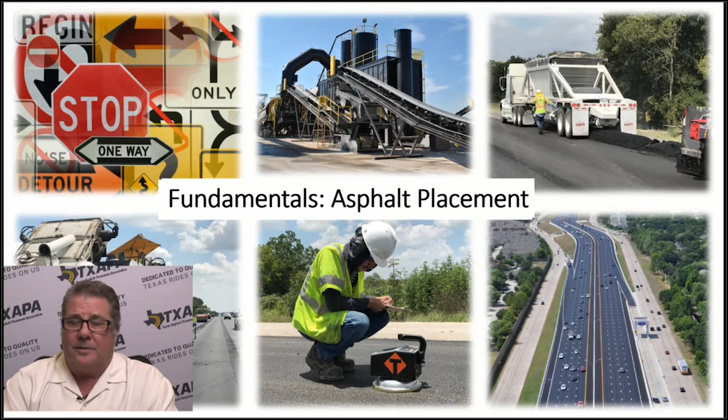Absolutely. And again, I really struggled with this particular portion of the fundamentals, because placement is so important. And I don't like to use the word basic, because it's not basic. It's difficult, it's complicated. But with Jim's help, we put together this presentation to cover the fundamentals, the essentials, the core of what we're trying to do, and that is, again, place award-winning mix. Yeah, if we get these parts done, we are 80% plus the way there, and we're going to get the type of pavements that we want. We're always going to be tweaking, but the communication and everything else we're going to talk about today is going to get us the rest of the way.

But it's important. Let's make sure we're doing these things every day, because as soon as we drop the ball a little bit, that's when one of the wheels falls off, and that's when we start to see issues. So it's hard in this industry, because you're trying to do the same thing day in, day out under changing conditions. Changing situations, different lifts, different areas, moving here, moving there, and still trying to deliver the same level of quality. So that attention to detail has got to be real high up on the ladder. But getting this stuff done right is going to get us where we need to get to.

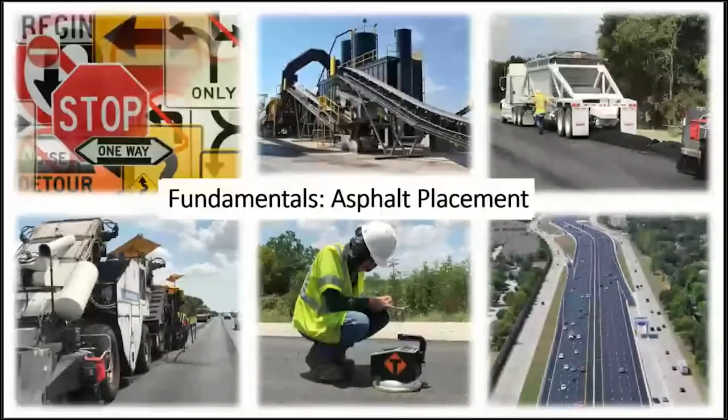So getting us kicked off, the very first thing that I have to go into is communication. Again, we need to start with the fundamentals, and this is communicating with everybody involved in the project. All of your QC and QA individuals need to be on the same page with your paving superintendent, your plant foreman, your trucking foreman, everybody needs to be on the same page. And what are we here to do? To safely build quality projects. That's what we're here to do. Nobody wants to be associated with a premature or a failed project, or a project that's really rough, or a project that looks terrible. Nobody wants to be associated with that.

Yeah, that's certainly one you don't want to talk about when your family's driving over.

Absolutely. And again, the way that we do this, the essential, the core to this is communication. If anybody's been around me any time at all, knows that I always bring safety first. And then my communication and quality is following second. But you have to be able to communicate, be open-minded. You cannot be closed-minded, and that's on both sides of the aisle.

We have to be in it for the same purpose, and that is to build quality, award-winning projects safely. That's the whole thing about communication. I can't stress enough. We've got to be on the same page here. And again, it's the core. It's an essential to being able to produce and place quality award-winning pavements.

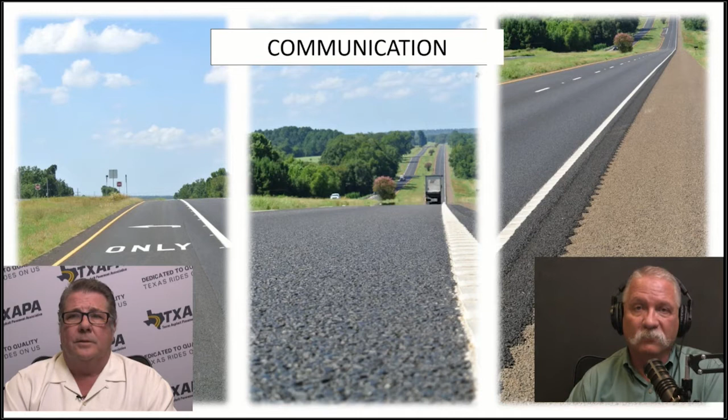Yeah, let me just share a real quick story. Got an email today from one of the students in our inspector series, and he was having trouble getting a certificate. We got it all sorted out, mainly because I made a mistake again. I'm pretty prone to doing that. But he made an unsolicited comment.

He says, we tried to apply the stuff we picked up in the class, and a lot of the class was about communication. And as he did that, the contractor was initially kind of like, "Hey, what's going on here?" But they explained it and they got around, and then him working with his other inspectors, he said, "Hey, they're already seeing a difference about just understanding those basic concepts, the fundamentals, whatever you want to call them, and executing them and getting everybody on the same page."

And so my guess is they're doing the debriefs like we've been talking about, and doing those other things. And initially, maybe a little weird, but they do work. They do work. I'm a firm believer in it. And again, it goes without saying that this is the core. This is where we need to start.

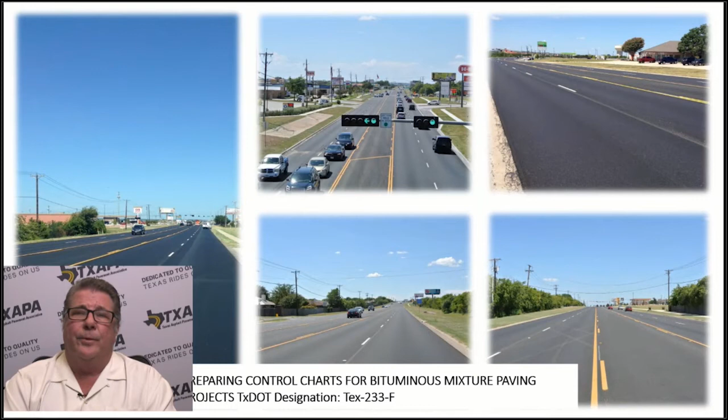The next thing we have to do is we really and truly need to pay attention to the specification and follow a quality control plan. It's part of the specification. It's something that we should be doing. Let's utilize it correctly. Every one of these projects are different, whether you're in an urban setting or a rural setting. Each one of these projects are going to be built differently.

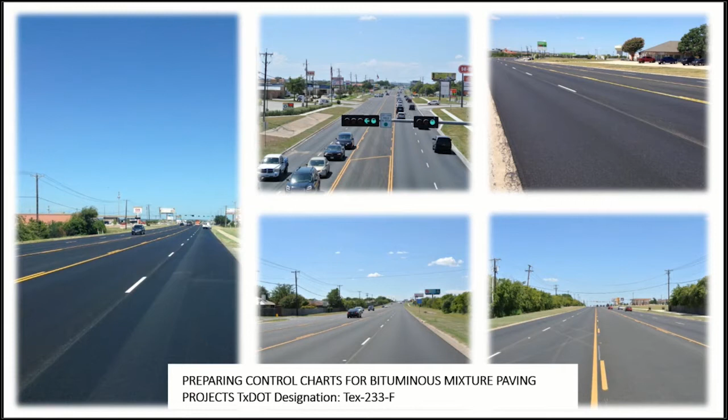And in that quality control plan, it states that you tell us how you're going to build the darn thing. And within that, it also states that you need to be able to use these control charts. And I'm telling you, if you plot your QC data on these control charts, you will know before you start having a QA issue. I cannot stress this enough. I'm a firm believer in control charts.

Jimmy Whited had taught me about control charts a while back. And I'm telling you right now, that is the way to go, both at the asphalt plant and in the field. If you're plotting your QC results and your QA results on these control charts, you'll be able to determine before you have an issue that an issue is going to be, and you can address it before it becomes an issue.

And again, quality control is for the contractor's protection. Run all those quality control tests, make sure you're on the same page, communicate those results to everybody involved. If we have an issue, bring that issue to the forefront and address it immediately. If you use these control charts and you run all your quality control tests, your QA will follow hand in hand, and you'll have an award-winning project like we're looking at here. These are all award-winning projects.

And they were done because they had a good quality control plan, they were following the specification, and they were communicating the results. So that's the start. Communication. Proud for anybody to ride on, and as you've said many times, we don't want surprises. That's right. By communicating, by sharing that information, by staying on top of it, by forecasting, looking for trends in your data, you're going to be able to do that.

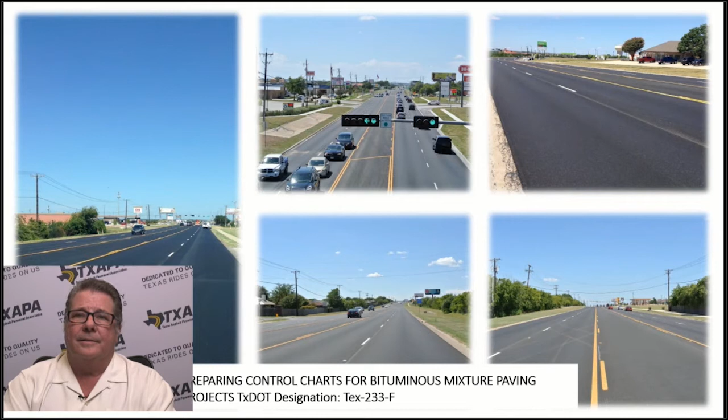And everybody, it's easy to do. It's not hard to do. It's just a matter of doing it and then starting to understand it. So good stuff. So we got the fundamentals, the basics out of the way. Let's get into our paving.

The very first thing that we have to really pay attention to is our traffic control plan. And since you've been here, Jim, you have stressed the fact that we need checklists. Yep. And I'm beginning to believe you that checklists are the way to go. And again, our checklist is let's look at our traffic control plan. Are we using an approved traffic control plan? Check. It's in the specifications. It's in the plans.

Is it properly installed? Check. The only way you know that is if you go through there and you double check where everything's at. Do we have the right signs, the right spacing? Do we have our cones at the right spacing? Do we have the right lengths, the right tapers?

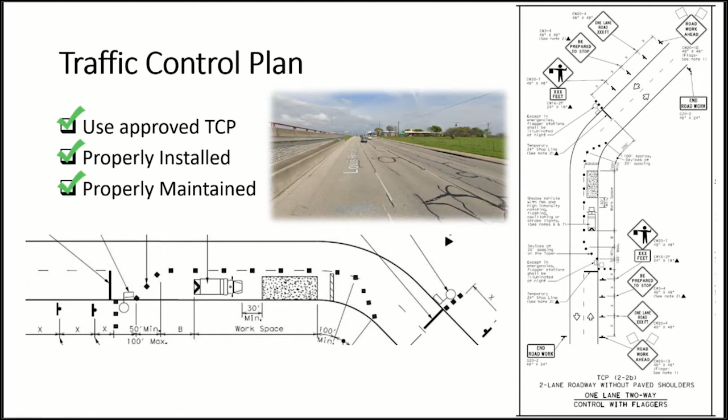So I want everybody who's listening right now to remember properly maintained, because we're going to hit that a little bit later on. Remember the words properly maintained, because if we don't do things safely and don't go home to our families, it's all for naught. Yep. And the traffic control plan set up properly and well maintained is going to help us do that.

And again, it's part of the plans, it's part of the specification. But before we start our paving process, we need to check off the fact that we've got our traffic control plan, it's in place, it's approved, and we're all on the same page. And remember, properly maintained. We're going to hit that in a second. So what about surface prep?

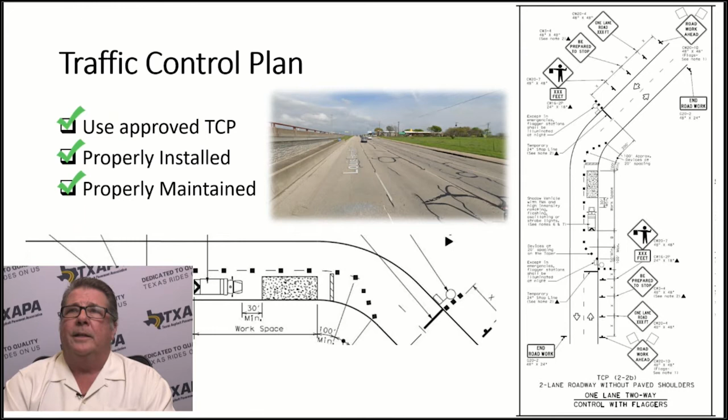Man, that's a key there, brother. Surface prep is a key. So is it clean and dry? And before you put a check mark there, just because the roadway might appear to be dry, with all this rain we've had in Central Texas over the last two weeks, is our roadway bed really dry? In other words, is there trapped moisture? Because as soon as you start putting a tack coat or a membrane down, you will trap that moisture. You're going to find it.

And I think that's a really good point, Chuck. After all this rain we've had for about a week and a half now, everything's wet. The stockpiles at the plant are wet. The base is wet. People want to turn the key and jam on the gas pedal, but we've got to be thinking about that, and our partners need to be thinking about that too. Just because we can pave doesn't mean we're ready to pave because of all the water we've had.

Especially if we're overlaying concrete pavement, those joints have absorbed that water, and that water is going to come out. Yeah, that's the thing. So checklist on clean and dry. Check on the smoothness, milling, level up, spot level up, what we need to do. And then again, tack coats. Hey, we're being paid for tack coats.

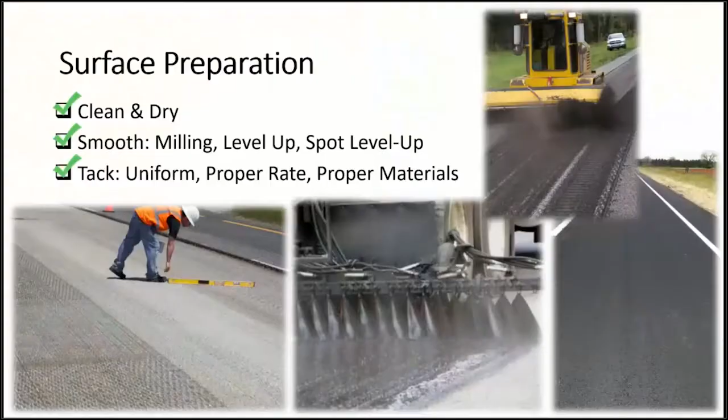All right, so now let's talk about trucking. So we got our surface prep, we got our tack coat. Trucking, do we have enough trucks? Is it going to be a balanced production rate? We're going to talk about that a little bit later, but do we have enough trucks for continuous paving? So if our balanced production says that we need 13 trucks and we only have 10, we're not going to do continuous paving, guys.

Well, you can have the trucks, you can order the trucks, have it all lined up, but a lot of contractors use subs, and sometimes the subs don't show up. Stuck with what you got. You're stuck with what you got, and you've got to be able to adapt and adjust on the fly to make sure you can still get consistent or continuous paving as much as possible.

So are our trucks clean? Sometimes when we have a milling field, that truck is taking millings back to the plant and then bringing hot mix back. Make sure that they're clean. Somebody needs to be looking at that. Yeah, tarps. Again, the specification covers tarps. Big fan of tarps. Are we loading properly? Do we have the multiple drops? Are we making sure that we're not segregating the materials in the trucks?

And then finally, I want to know about the clean out location, Jim, because this is one of your pet peeves, and you've seen it and I've seen it. Yeah, so cleaning out in front of the paver is not what we want to do. Cleaning out in front of the paver is not where it's at, huh? Not where it's at, baby. We need a dedicated place. Everybody knows where it is. And that dump man isn't raising his bed back up. He's dropping the bed, going to that dedicated spot, getting that stuff sorted out, then getting that tailgate latched and getting back to the plant for another round.

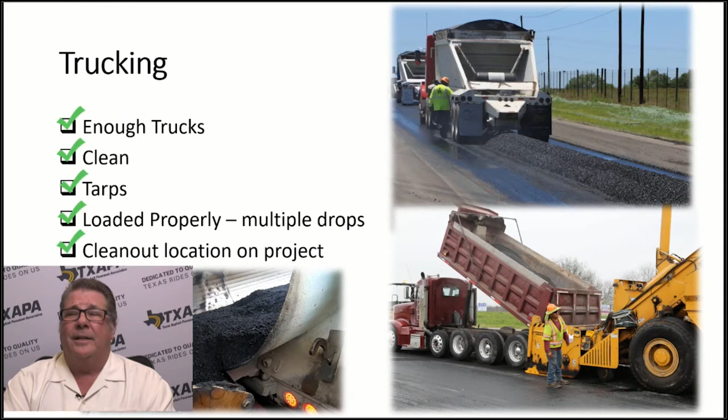And again, it goes back to communication. Who's going to designate that area, where is it, and do all the truckers know about it? It just boils back down to that communication. I've seen contractors where they've actually got it flagged out, flags set up in these areas. They know where to go, and the ingress and egress of trucks into the job site. We talk about traffic control. Trucks have got to get in. They've got to get out.

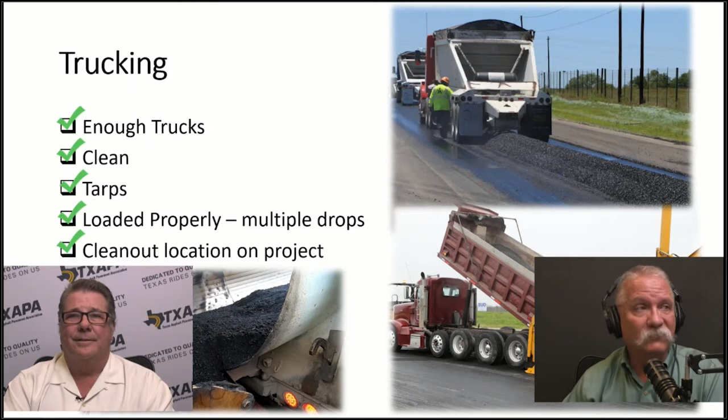And I've seen situations where they give an internal paving traffic control plan to the truckers, and they know this is where I come in, this is where I clean out, this is where I go out, and I don't deviate because you got people moving in and out. We don't want to have an accident inside our traffic control plan. And it boils down to that communication.

Yep. What about our MTV and paver setup? Boy, this is a big one. Yeah, it really is. We could spend hours, about 2 days, talking about setting up the MTV, making sure it's set up correctly, and the paver is set up correctly. We got Pave by the Numbers. I know this is a Cat handout, right? But it works for every paver. It doesn't matter what you have. It's a really good tool to utilize.

Again, it's a checklist. Once again, Jim has shown me the importance of a checklist, so I really appreciate that. If you miss one of these items on the checklist, you're not gonna have a good, continuous, smooth, durable, long-lasting mat. It's just not gonna happen.

If you go onto YouTube and type paving, Pave by the Numbers, I think there are several videos on this up there. Todd Mansell's on there. If you go to Cat's paving site, you can download all this stuff as well. We'll talk about a bunch of resources later on before we leave today.

There's just a lot of good stuff out there. This is not new. Yeah. Okay. None of this stuff is new. Yeah. But even using the starting blocks, we talked about that this week in Dallas about getting those starting blocks down to allow for that material to compact, so we don't have bumps or dips at our joints, and we get good tight joints, and we got good smoothness on our roadways.

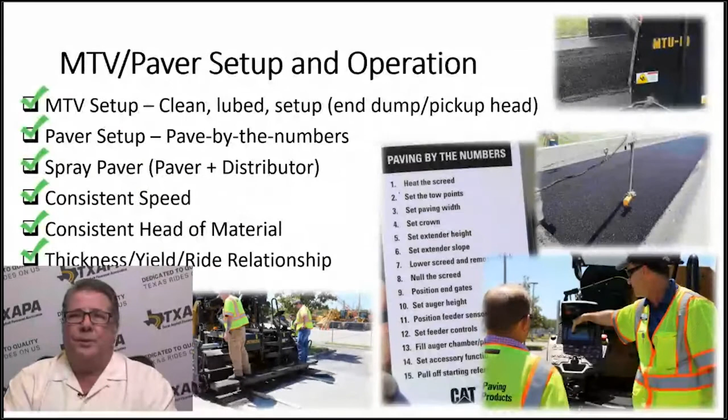Yep. And then we're going to talk about consistent speed and consistent head of material. These two go hand in hand. Yep. It's a huge, and again, this is the basics. Anybody who's been around a paver knows that the head of material and the speed of the paver is going to dictate whether or not we're going to have an issue in the mat, behind the mat. And so those are going to go hand in hand. Again, paving by the numbers will help you with those two.

But I think it's also important that we understand that there is a relationship between thickness and yield. Thickness is trying to laminate the existing layer, and yield is actually trying to improve the smoothness, which gets into ride. But remember, and again, this is the 2-hour version of it, that paver's only got 2 inputs, and that's a tow point on either side. And you can only put 2 inputs.

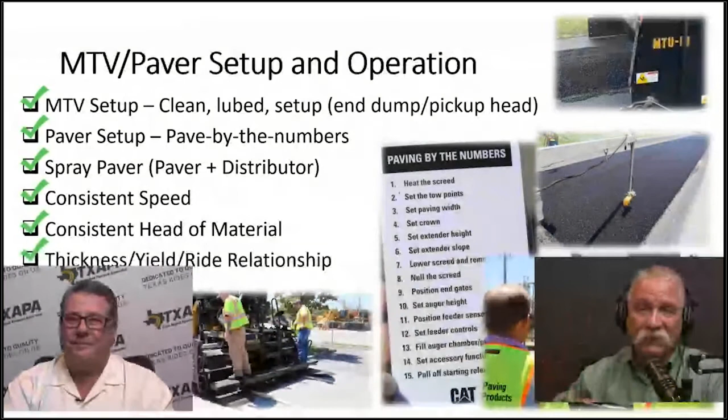So you can put ride, slope, thickness, those kinds of things in there, but you can't get everything into that paver all at once. And so it is limited on what it can do. So just because you can see a straight line on a CAD drawing doesn't mean we can actually do that with what we've got. So this is where the communication again continues on.

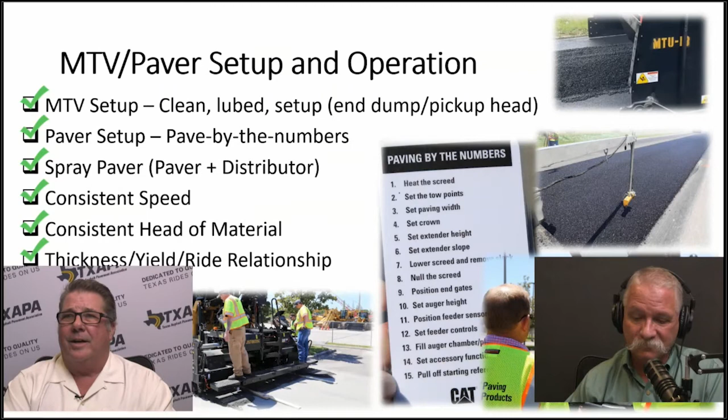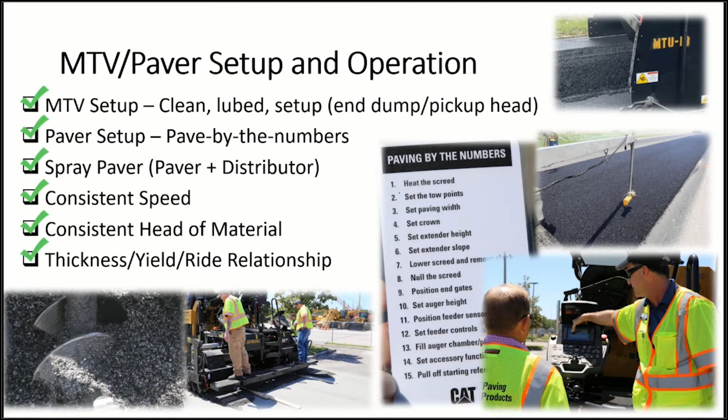Great point. And then of course, Glenn Dvorak last week talked about the ride. And if anybody has any questions or issues, need to look at that presentation that Glenn, hats off to him, because he really hit all the aspects of that ride.

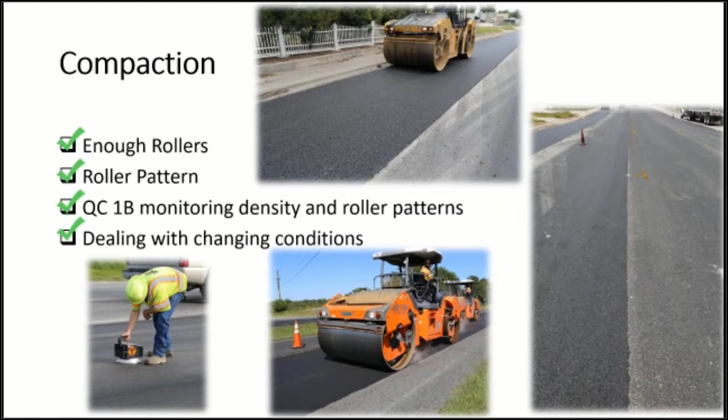And then when that roller comes in, it's just coming right in there and pinching that material in. And you end up with a nice tight joint that's going to work and going to give us performance all the way across, not just in the middle of the mat. Good full joint. You're absolutely right. All right. So we're still here with compaction.

And I just want to say real quick about pneumatics. I'm a pneumatic guy. Other people are not. I know a lot of companies that don't use pneumatics, but I'm a pneumatic guy. The thing about pneumatics is that they can really help that finished product, but they could also really screw up that finished product. Yep. Once those pneumatic tires become cooled off, or if they're not skirted, or if you put too much release agent on them, which I'm not a big fan of release agents on the pneumatic tires. Right. I'm a firm believer in keeping them hot.

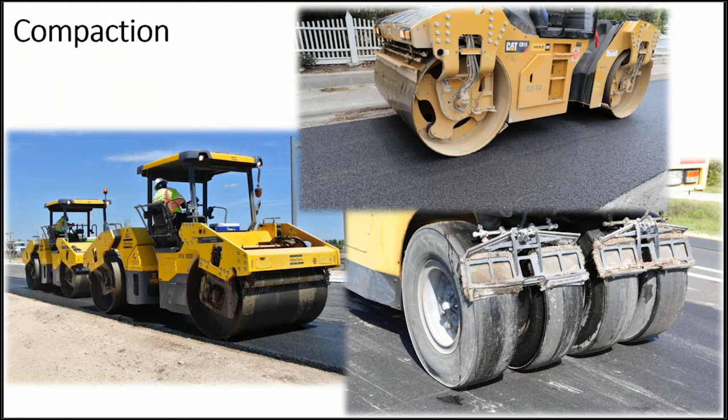Right. But once it starts picking up, guys, that is ruining an award-winning project. If your pneumatic tires are picking up, you're on it too hot, or you're not getting your tires hot enough, it's not good for the overall appearance. And again, you're picking up the fines. It's going to be detrimental to the mat.

And the other thing I cannot stand when I'm doing pavement evaluations, if I see stripping, if I see that pneumatic tire where individuals are squirting that release agent on the tires, and it's actually stripping the fines off, that first 100 feet. Again, if I see that every once in a while, that's one thing. But if I see it consistently throughout the project, that's not what we're looking for.

And again, who's responsible for quality? Everybody. We all are. We're responsible for safety. Everybody. We're responsible for quality. Whoever sees that pneumatic picking up should stop, say, hey, we're on it too quick, or we need to get our tires hot. And we don't use a lot of skirts. I don't see a lot of pneumatics with skirts on them.

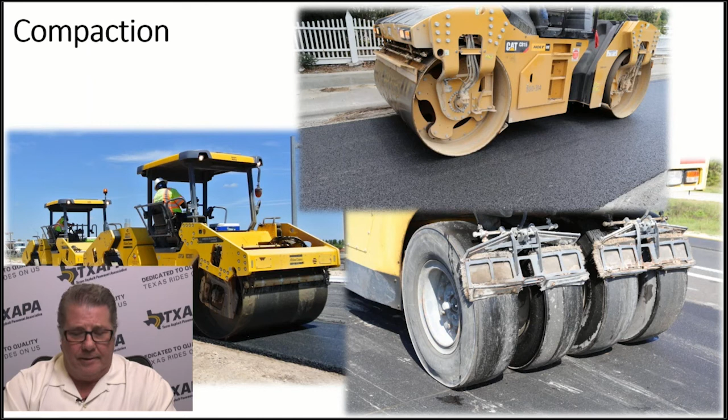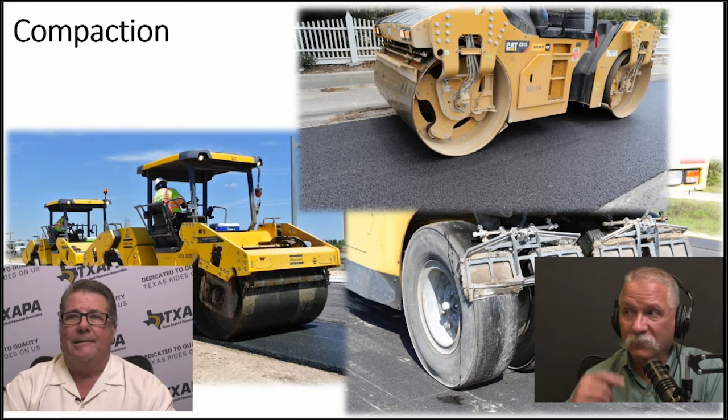Yeah, other parts of the country, man, they're skirted all the time, and that just keeps the heat in. They can be lifted up, so you can get access to check the tire pressure and make sure everything's clean, that the pads and scrapers are in place, and you've got everything good to go. But right there, those pads and scrapers are really important.

And the good news about the pneumatic rollers or the rubber tire rollers is you're not going to overcompact with those very much. It's hard to. So they can keep those machines running and just let that roller go back and forth and just kind of idle back. And when they're done running, again, just like any of the rollers that we're talking about, where do we never park? We never park behind the paver. We always park back where it's cool. We park on an angle. So if there is a mark, we can roll it out.

All those little basic things, all those little bitty things where we're sweating the small stuff makes a difference. And every time that roller stops, we've got an opportunity to either hurt or help our ride. And so, again, paying attention to the essentials.

What about our checklist for testing? Okay, now they're out there paving. We definitely are involved in testing. And again, what to test, when to test, and the frequency of the test, it's all in the specification.

It's all there for us all. And again, check off all those as we're out there in the field working through it. And this is so important. The next one here about the chain of command and responsibilities, QC and QA. Absolutely. That's where the communication really has to pour in there, guys.

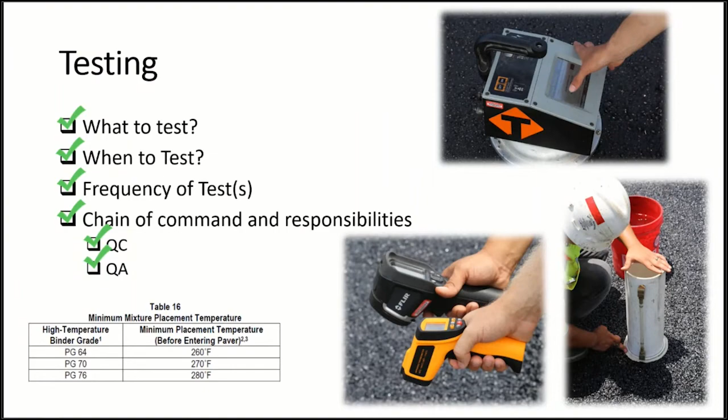Yep. All right. So what about our resources, Jim? We have a bunch of resources. There is a pile of them. We've got most of them in one spot right there on that website. Yep. TexasAsphalt.org. And then underneath there, you'll see under the resources, all hands plan five. And I'm telling you, we have a ton of resources there. Not only do we have resources to help you guys out in the field with these different apps, but there's also the updated test procedures.

So if these test procedures have a direct effect on the outcome of your results, then those test procedures that have been updated and approved are there in the resources. So it's a great place to go. Again, you can use your iPhone to be able to pull these down. We just have a lot of resources to help us not only balance our production rate out, but to help us in getting consistent density throughout the mat. Yeah, I can't stress that enough.

Absolutely. And if you need any help with any of these, send us an email, give us a call. We'd be glad to walk you through these. We've got a lot of resources up there on balancing production rates. Obviously, this is a contractor function.

And don't get too weirded out by holding things to a ton per hour, but it's the idea of letting the rollers keep up with the paver, keep up with the trucks, keep up with the plant, and not just how much the plant can produce in a given day and that's all we're going to lay, and leave the rollers behind. So we're actually looking at it almost backwards, letting the rollers dictate the actual production.

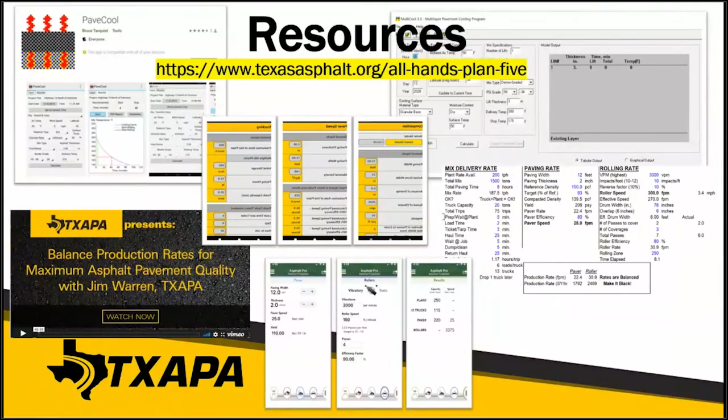And again, these resources are there. One of my favorite resources is the balancing production rate that Jim has, and then also the Asphalt Pro that Robert Lee has put together. Both of these are on there. We could spend 45 minutes to an hour just on this, but the main thing here is at the bottom corner there, when the rates are balanced, make it black.

And I love that. You know, it's the same thing. And both of these programs are really good. The one that Jim has put together here, the balancing production rate, he's actually done a video. And that video is on that resource page, and that video walks you through how to do that. And then, of course, the Asphalt Pro has the same information on it.

Both of these could be utilized with your phone. And again, it's a great tool to use. And then another great tool... Before you leave that, it's also on our YouTube channel, and we've actually developed a free learning management system course. If anybody wants to take the balancing production rate, just contact us, and we'll get you the link. It's free. It's no charge. You can kind of do it by yourself. It'll take you about 45 minutes or so.

45 minutes. There are several quizzes in there, and you do got to pass to complete the course. So bring your calculator, guys, because you're going to need it. We're going to make you work a little bit. I know I went through it, and you got to have a calculator. Again, it's so important, and I like that, Jim, that we have that available, because you can walk through it and then take the quiz to make sure that you understand the process. It's right. It is a process. So, good deal.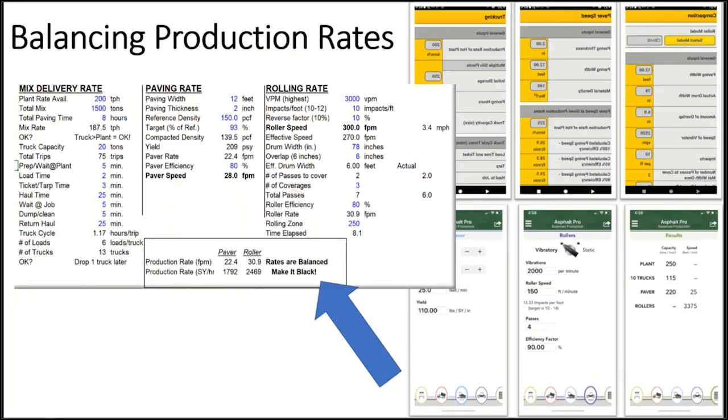And then we have a great tool here, especially with the wind and our ambient temperatures, using cooling rates to determine your time available for compaction. Yep. And those are two different programs that have been written over the years. They're not fancy. They're not necessarily apps. They're generally compiled programs. No one's actually compiled them into an app. But if you Google PaveCool or MultiCool, you'll get either one of these, and they both work.

And they will tell you for a given set of conditions, a given set of starting temperatures and given thickness and ambient conditions, how long that mix takes before it cools off. And you choose what bottom end you want. So if you want to stop at 200 or you want to stop at 180 or something like that, you can plug that in, and that'll give you an approximate time.

I think the key part of this thing is when you're paving thin, it really affects the time. Absolutely. And so when you get into the fall and your base conditions change, and you got low base temperatures and low air temperatures, and you're trying to lay an inch, you get in some situations where you may have 5 minutes to get everything done. And that is not a lot of time at all. But if you got to do it and you staff up accordingly and you get enough rollers, guess what? You could probably do it. So it's just a matter of understanding what you're getting into before you get into it.

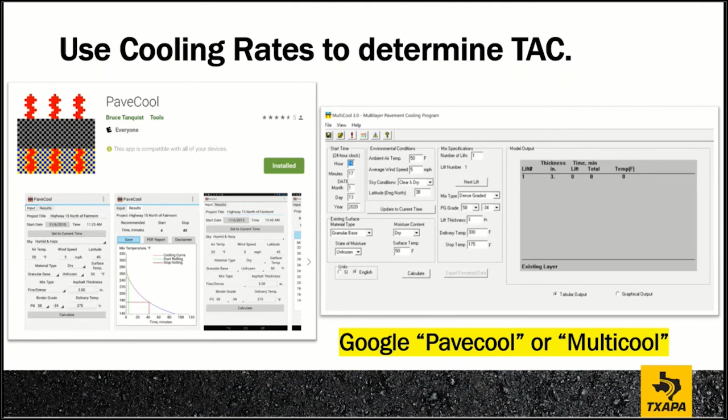It's great for playing what if. Excellent for playing what if. What if the temperature changed? What if the wind speed increases from 0 to 30 miles an hour and the direction changes, and now I'm paving at night instead of during the day? Yep. All those things will give you the opportunity to see what's going on there. They're free. They've been out there for years. It's good stuff. And again, utilize the resource page for that.

Again, texture and ride does matter. It's what the traveling public feels. That's the number one thing when the traveling public is being queried on what they see with their pavements. It's how smooth it is. It's all about smoothness, the texture and the ride. And if you could see irregularities or streaks behind the mat, you can fix it. There's adjustments to be made to be able to fix it.

But again, these are all award-winning projects. We've seen quite a few of them. We had 76 or 77 nominations this year. We're in the first round. Glenn Dvorak's group is in the first round of pavement evaluations. I've evaluated 12 pavements, and I'm telling you, I saw some really good pavements out there, Jim. We really do have some good-looking pavements. Yep.

A lot of work goes into that. Absolutely. And my hat's off to Glenn and his crew. He's got some guys out there doing pavement evaluations all over the state of Texas. Really do appreciate the fact that you guys are committed to helping us do this program. And it's very important, not only to the contracting community, but to the districts that are involved.

For a district to win a quality award pavement, it's a big deal because it shows two things. It shows, first of all, that the district is committed to the quality. And secondly, it shows that the contractor and the district have worked together to do it. There's never been an award winner that got up there and said, I did it all by myself. Every single one has said, I could not have done this if I didn't have my partner with TxDOT on my side, helping me through and making this happen.

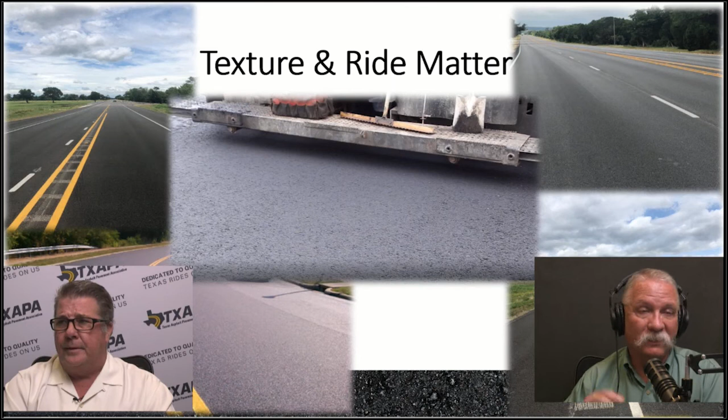Good deal. I was just going to bring that up. It's a team effort? Absolutely. It is a team effort. And so my hat's off to you guys.

And finally, we're going to talk about our daily debrief. You guys remember what we talked about earlier about the traffic control? Is it set up correctly? That's the first thing I want you guys to talk about on your daily debrief. Did we safely move the traffic over? Did we safely work around the traffic? Were there any issues on safety? If there's not, we put a checklist there. If there is, we address it before or after the shift. Every shift, we do it daily.

These daily debriefs are not very long. You do not have to spend more than 4 or 5 minutes. Every day, you could start with safety, and then we talk about what is the plan for today. What's the plan for this shift? What are we planning to do? And did we achieve what we were supposed to do on the last shift? Why or why not?

And then again, communicating these test results. This is our mix properties, our temperatures, our in-place air voids. All these tests, these QC and QA tests, need to be shared with everybody, especially at the plant. So all reports and documents should be turned in timely. And what is the plan for tomorrow?

I know that this is not asking a whole lot, but at the end of the shift, you guys might be tired. You had a night. You're ready to go. I get it. But before you start that next shift, let's talk about what happened in the shift before that. Absolutely. And start with safety.

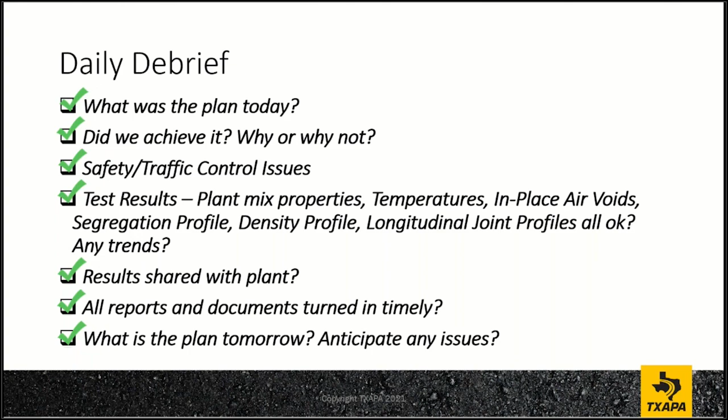All right, we're talking about communication. Jim, thank you for the checklist. Thank you for putting that program together. You're welcome. I was struggling with it. I know that yesterday you saw the struggle in my eyes. You're like, it's going to be okay. And I said, well, we're going to talk about the head of material. We're going to be talking about paver setup and the 5 forces. And you said, hey, take it easy. Let's do a checklist. I really appreciate you taking your time with me and calming me down and helping me out. No problem. I really appreciate that. Well, thank you.